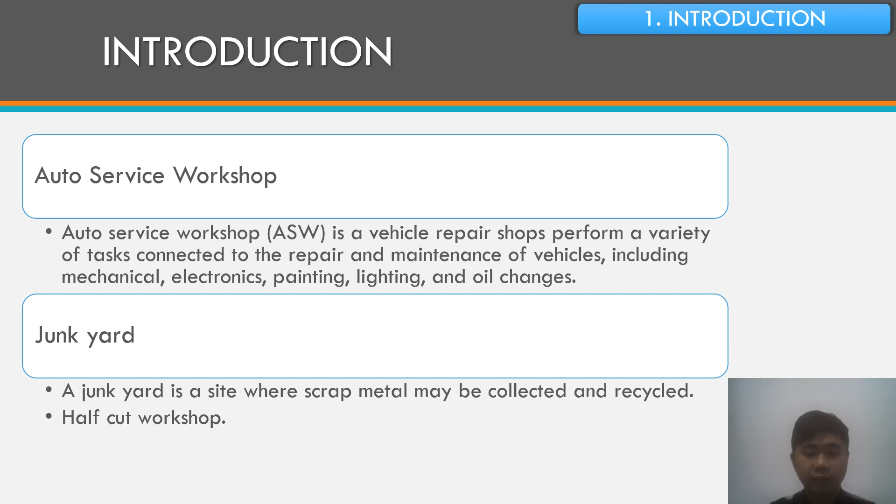In this study, there are three important terms you must know: ELV, ASW, and junkyard. Auto service workshop, referred to as ASW, is a vehicle repair shop performing tasks connected to the repair and maintenance of vehicles, including mechanical, electronics, painting, lighting, and oil changes. The junkyard is referred to as a site where scrap metal may be collected and recycled, also called a half-cut workshop.

In this slide, I will present the problem statement. Vehicles, which are vital to society, are becoming increasingly popular. When the engine and motor of a vehicle are no longer usable as it approaches the end of its useful life, useless components can generate 1 million tons of garbage each year, making it critical to develop strategies and methods to reduce environmental consequences.

More information and practice should be given to residents in Malaysia to counter the negative consequences of unstable or unpredictable industrial environments. Thus, the purpose of ELV is to convert the unusable vehicle into small components that can be recyclable, manufacturable, and reusable to save the environment.

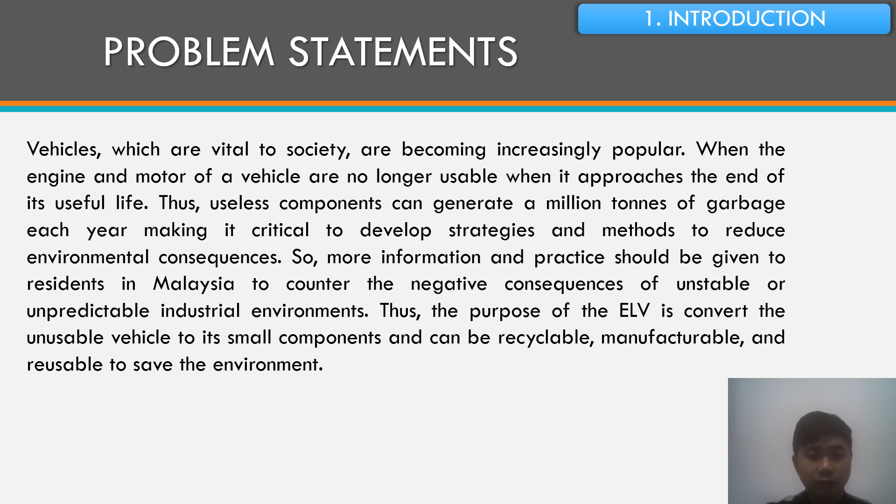In this study we have three objectives: first, to identify the ELV relationship between auto service workshop and junkyard; second, to investigate the preferable parts of ELV for auto service workshop; third, to provide the proper standard operating procedures of operating ELV products for auto service workshop.

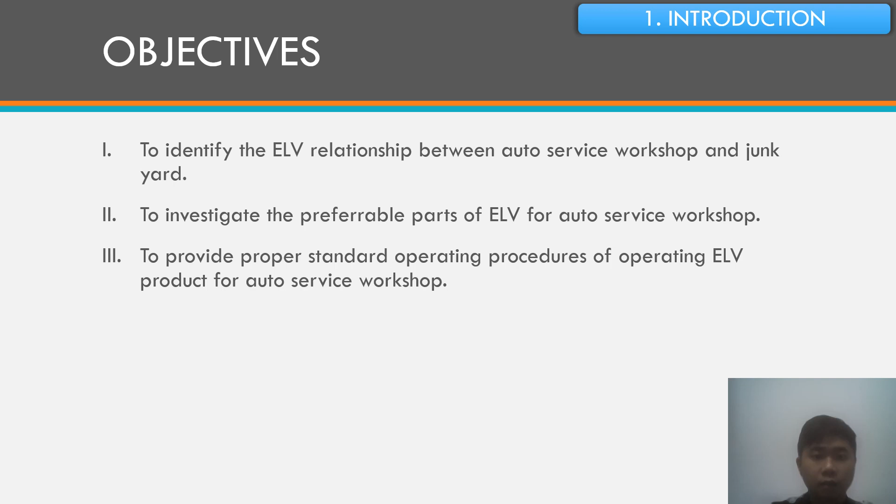Here is my scope of study. The chart below shows that when a car arrives at the end of its lifespan, it is classified as an ELV.

We have two types of vehicles: commercial vehicle and passenger vehicle. My focus is only on passenger vehicles. I will perform data collection, which includes observation, interview, questionnaire, and checklist, in auto service workshops (ASW).

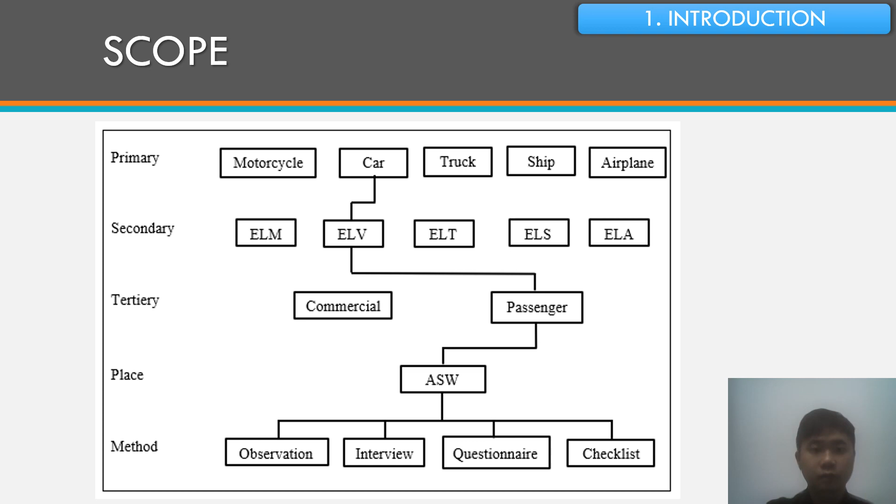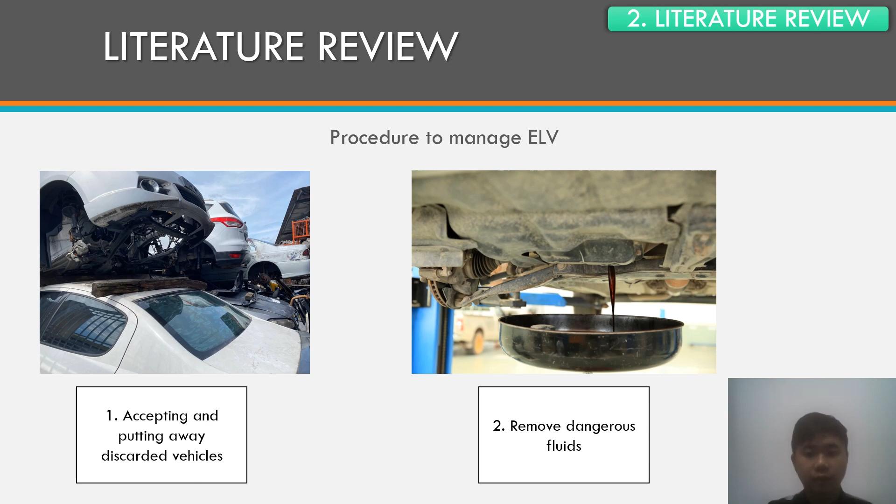Below shows the 6 procedures to manage the ELV. First, accepting and putting away discarded vehicles. Second, remove dangerous or hazardous fluids, for example CFC from aircon, battery fluid, engine oil, and brake oil, to prevent the hazardous fluid from flowing out and contaminating the soil.

Third, dismantling for reusable and recyclable parts. Bumper, alternator, power pipe, gearbox, and tire rim are some examples of reusable parts from ELV.

Fourth, all the reusable parts are stored at one place. Normally, they will store it on the rack.

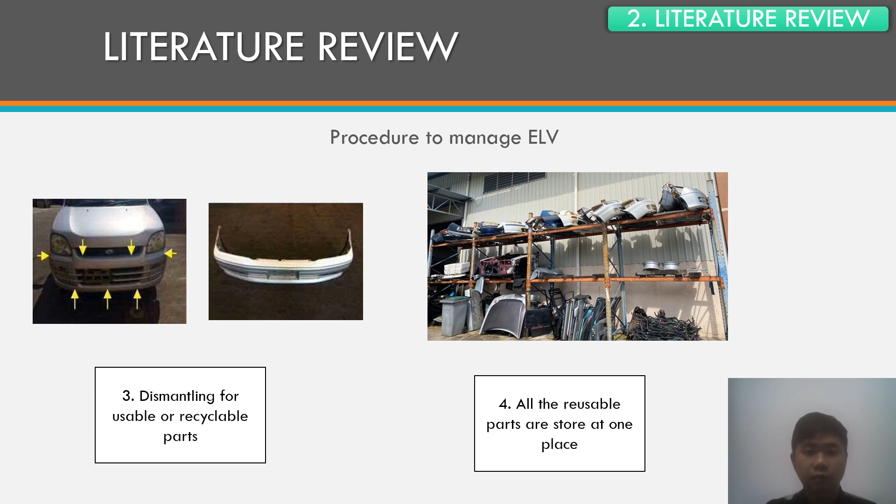After removing all the dangerous fluids and reusable parts, the vehicle will be sent to half cut. The purpose of half cut is minimizing the size of vehicles so that they can be put into a container, easier for the delivery process.

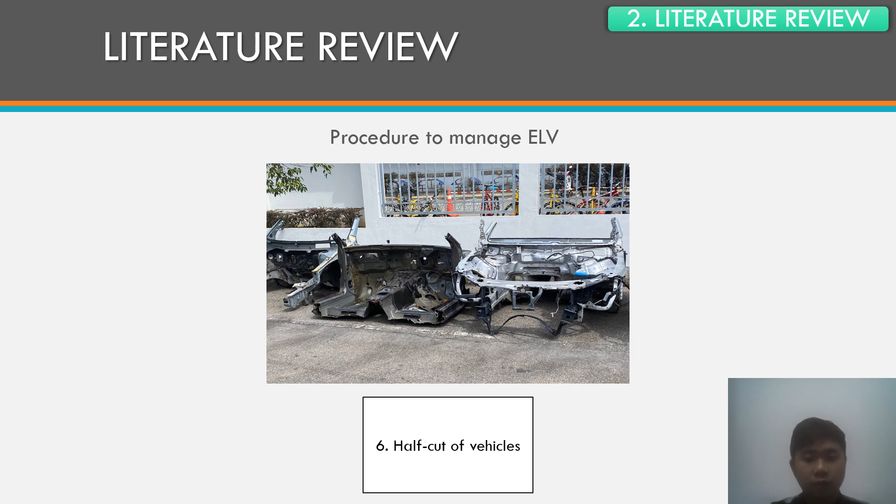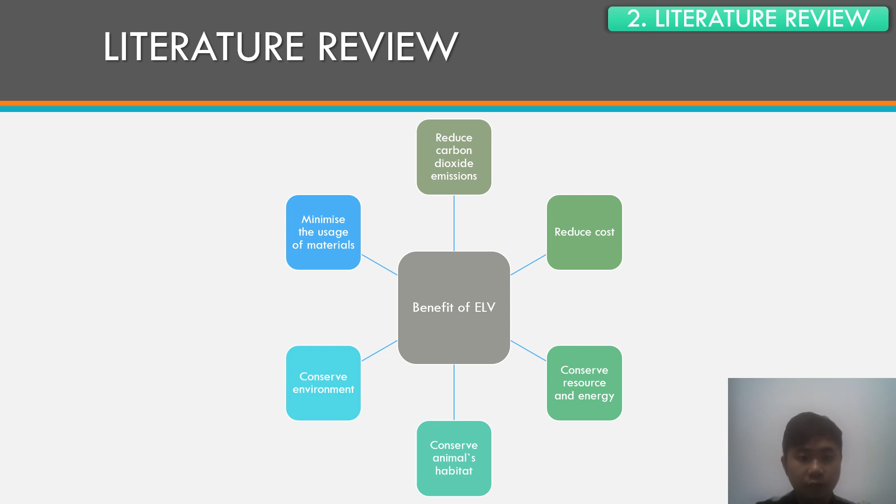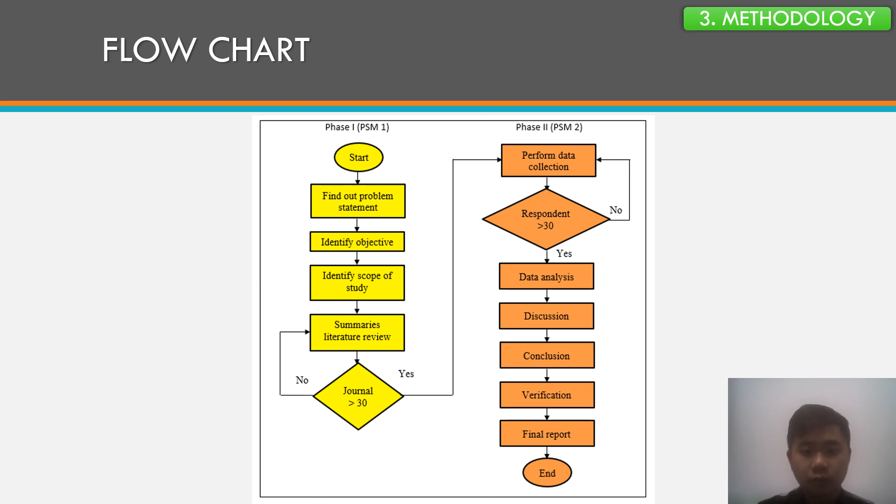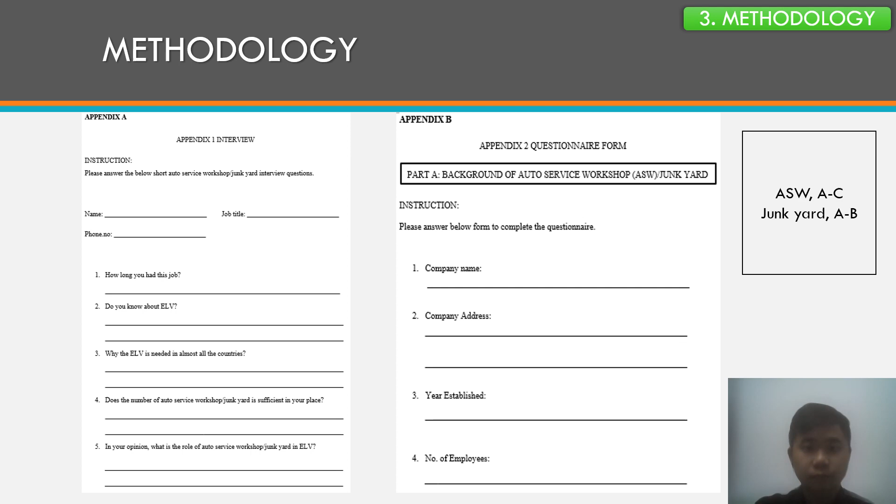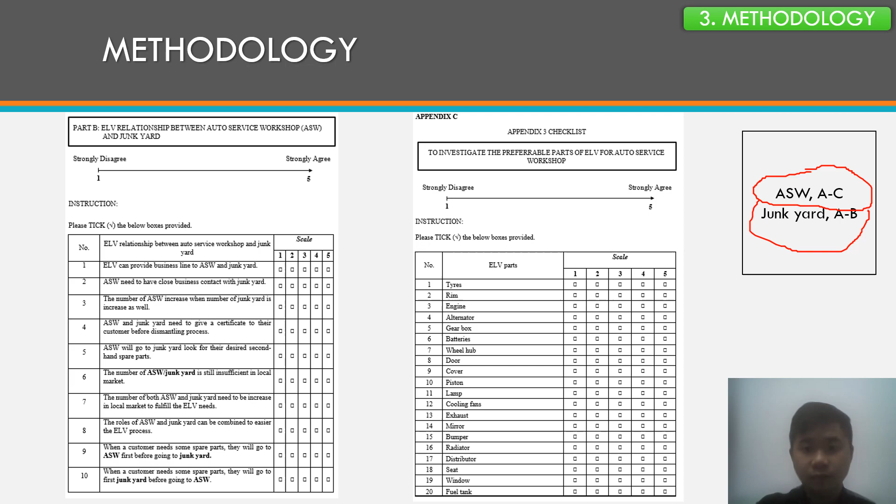From the preliminary study, I have visited 2 auto service workshops and 1 junkyard. Those workshops are all in Malacca.

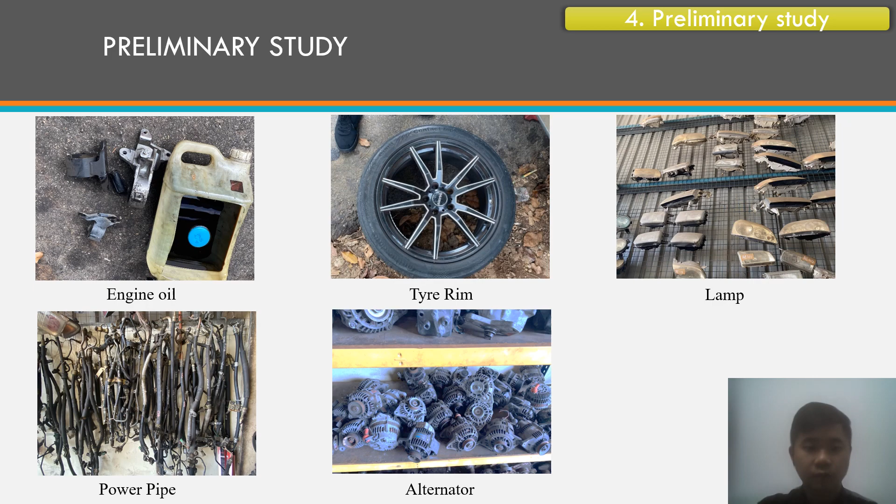Here are some recycled parts collected from auto service workshops and junkyards, for example engine oil, tire rim, lamp, power pipe, and alternator.

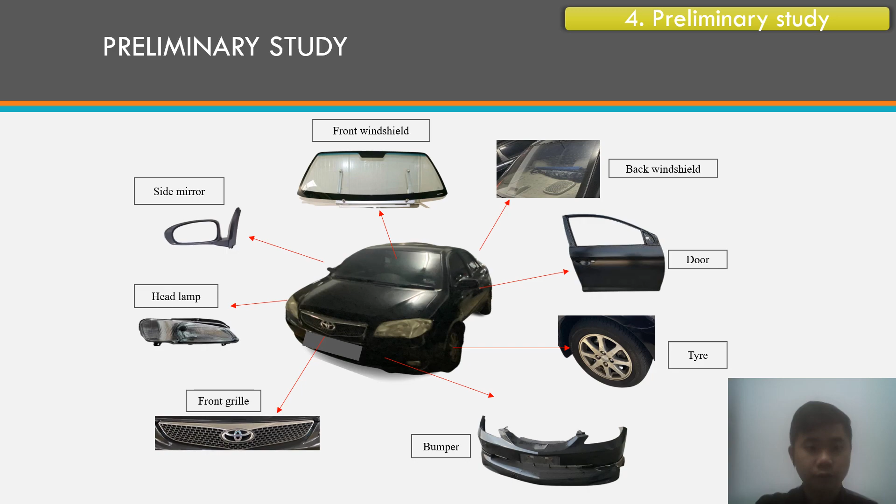From the preliminary study, the current situation of ELV parts in the market can be analyzed. Most customers come to the workshop looking for spare parts, and this preliminary study can better observe what types of spare parts they are looking for, enhancing the knowledge of ELV and preparing for the study in phase 2 later.